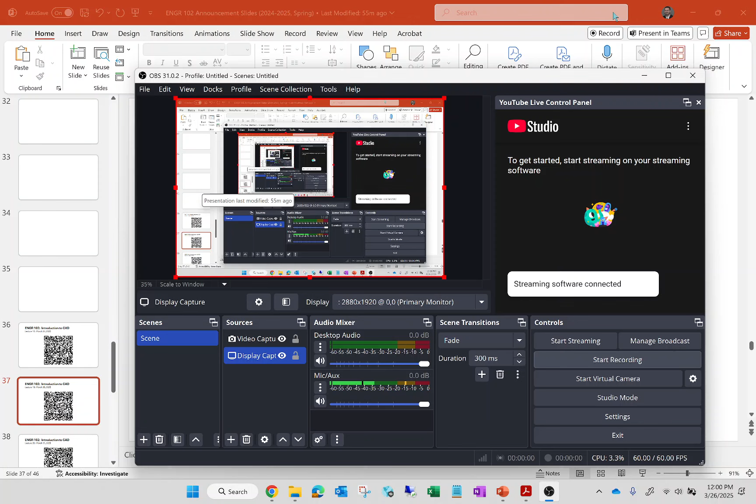This assignment is one of the most comprehensive we've had this semester, because it combines a lot of the skills and topics we've learned throughout the entirety of the semester. You're using quite a bit of AutoCAD knowledge, freehand sketching, scaling, all sorts of stuff. So it's a pretty valuable exercise.

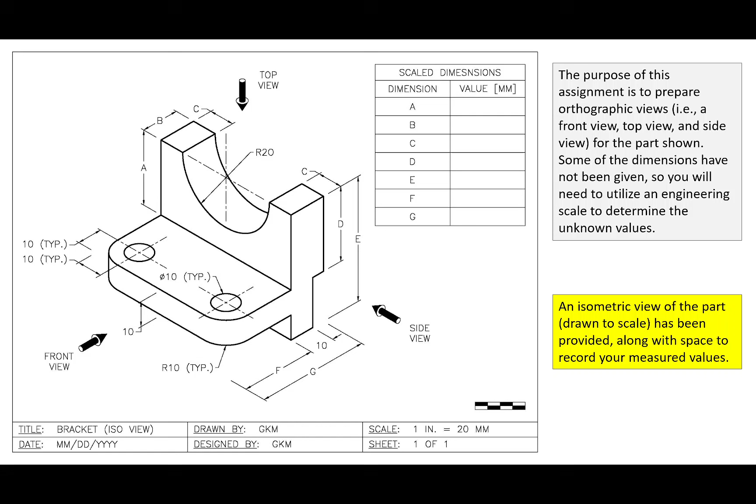This is a drawing to scale at 1 inch equals 20 millimeter scale. I'm giving you this drawing with several dimensions unknown and space to fill in using an engineering scale. Your job is to produce this. I'm giving you the side view, with numbers instead of letters, and your goal is to produce a drawing with the side view, top view, and front view. I'm not giving you the front view and top view—you'll have to figure that out, maybe using those sketching muscles to generate it.

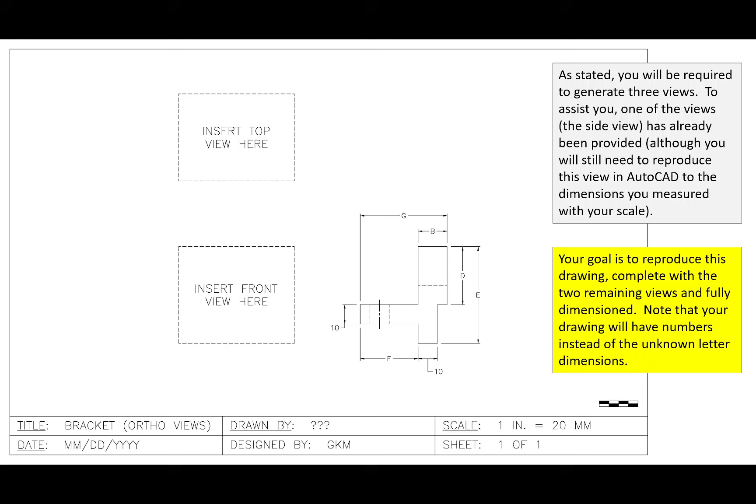Now, a couple things about the nature of this assignment, meant to make it go fast. Let me pull up the assignment. Number one, when it's all said and done, I want the drawing on an ANSI full bleed B at a 1:20 scale. The font should be Roman S, and I'd adjust the text style, not each individual dimension—that might make your life more difficult.

The title block and scale block: whenever you open AutoCAD, before drawing the objects, the first thing you should do is create the title block, create the scale block, then increase the scale, then start drawing the objects. Don't start drawing the actual bracket until you've drawn the title block and scale block and upscaled it accordingly.

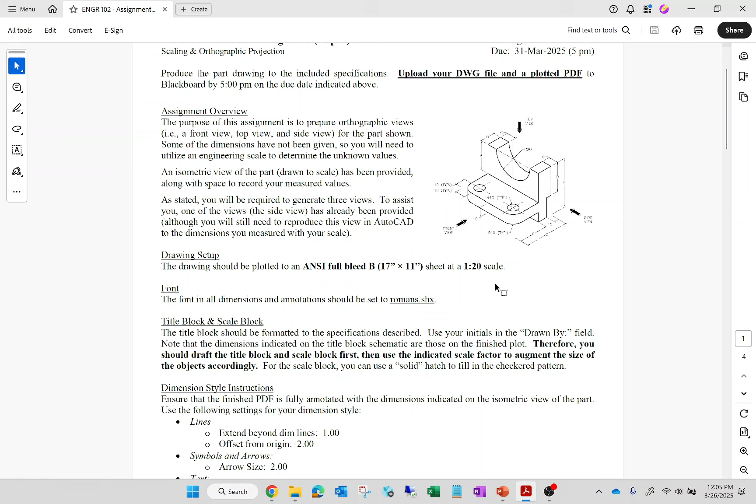If you remember the football field exercise, we had the football field already drawn and the title block already drawn, but we had to increase the scale so it would fit. You don't have the football field already drawn—you have to draw that. So my advice is to draw the page and everything at a 1:1 scale like you would normally draw it, then use the scale command, then start drawing the object.

I've given you the dimension style and the text style. One thing I am not giving you is specifics on exactly how many layers to use—that's up to you. Use as many layers as you want, whatever color layers you want. It doesn't matter because you're going to be printing the drawing as a PDF to monochrome.

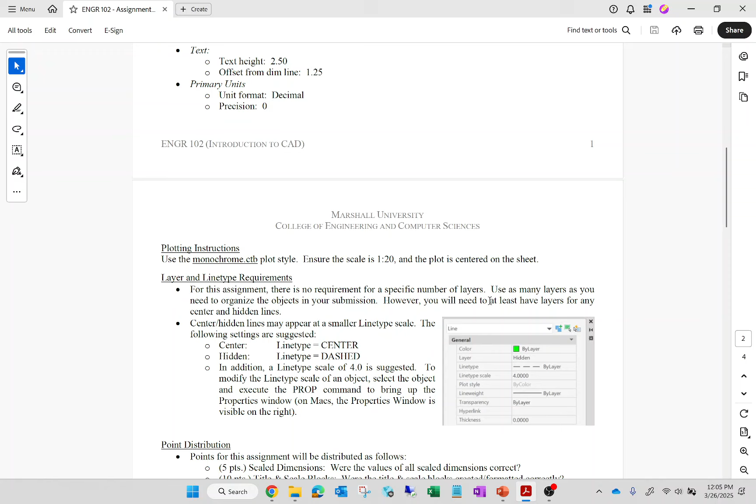But I think you need at least 2 layers for the center lines and the hidden lines, the dashed lines. I have guidance on how to do the dashed lines and center lines so they show up to scale accordingly, and you can read them. I also have notes and guidance for how it should look when it's all submitted—take a minute to read through those as you're preparing the drawing.

The first thing you'll have to craft in AutoCAD is the title block, page border, scale block, and all that. I'd really pay attention to the notes on this drawing and the dimensions. For example, there's a difference between the width of the page being 17 inches wide and the width of the page border being 16.5 inches wide. Before you start doing any text, make sure all these dimensions are correct.

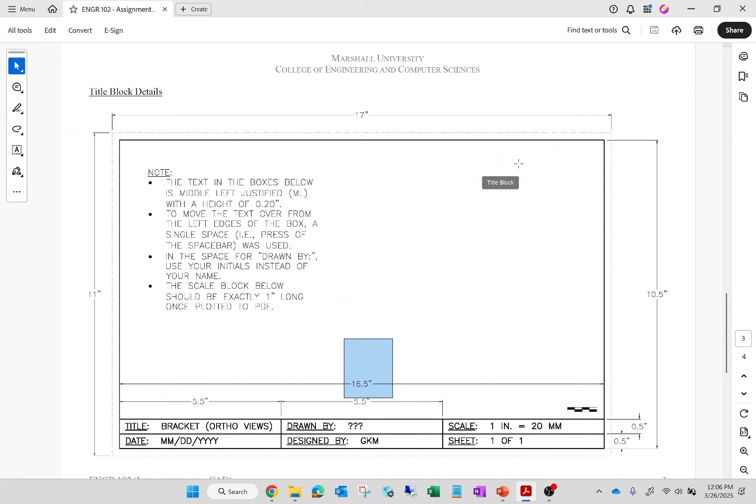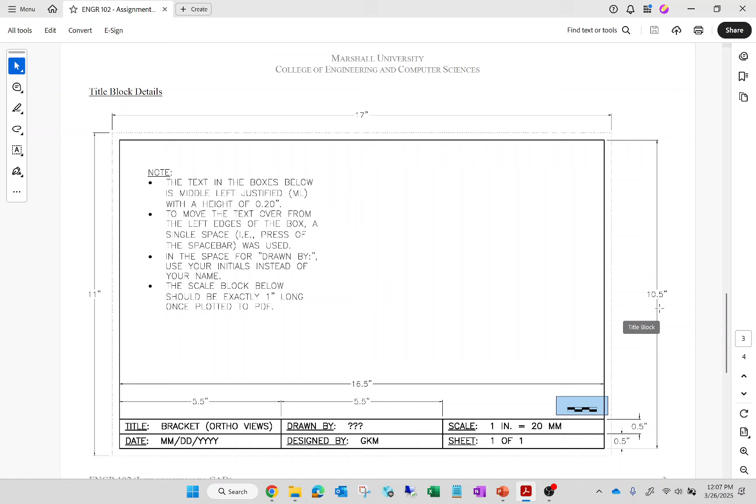Make sure you're paying attention to this, because it tells you how to generate that text. For this scale block at the bottom, I don't care how tall it is, as long as it's 1 unit wide or 1 inch wide when plotted. What I do here is have a horizontal line, a series of vertical lines, then use a solid hatch to fill in that checkerboard pattern. This page is what it should sort of look like when plotted to PDF. Any questions on that?